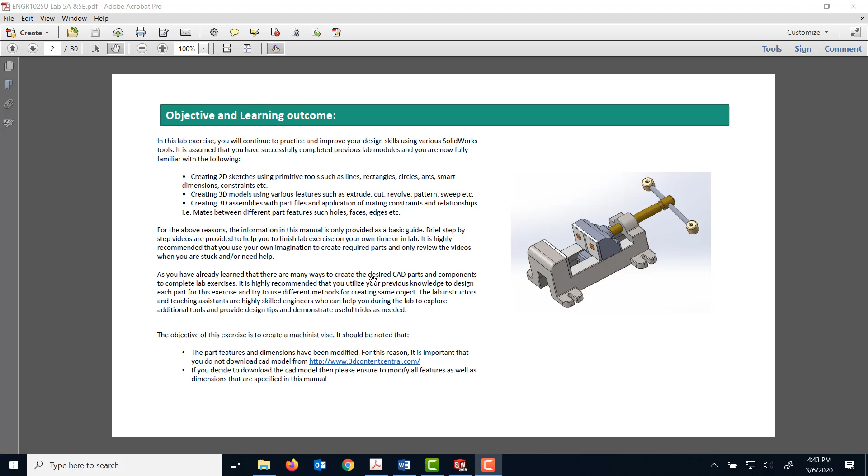The first component that I'm going to design as part of this exercise is called the vise lead screw. This object, when I look at it, could be created two different ways. I could just think of it off the top of my head. One way is you could create a 2D circle sketch.

You could extrude it, and then draw another sketch and extrude it. And then on this surface, you could draw another circle and extrude it. And so you could continue on to create the shape.

Or you could simply draw a 2D sketch. You could draw a center line right in the middle, and scale these dimensions, the diameter dimensions, specifying the radius dimensions along there. Then if you draw the half sketch of it, you could use the revolve base feature to do the revolution and create this 3D object.

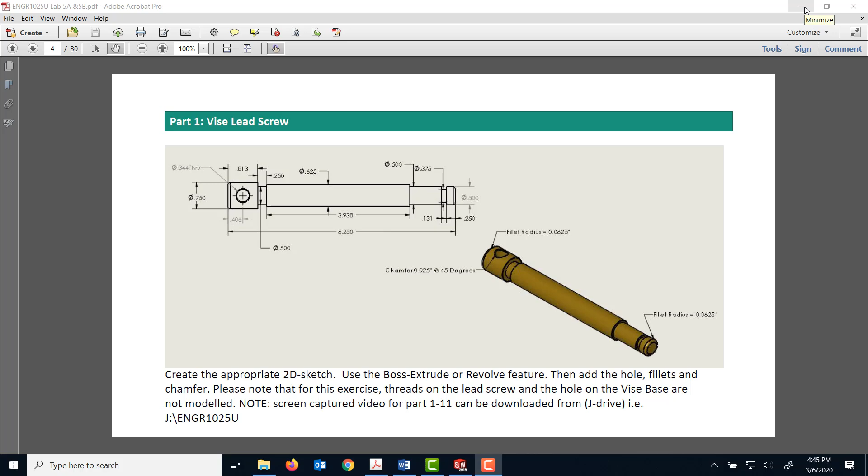So in my case, I'm going to do the revolution method to create this vise lead screw. To start, for this lab exercise, you will be working with the IPS unit. The reason for that is because in North America, the IPS units are still used quite often. So in this lab exercise, you will use that for all the components.

So to start the process, I have already created a folder with our naming convention. I have called it ENGR1025U underscore lab 5, but in your case, you will put your student ID in there. So I'm going to name the first part as...

Vise lead screw, and I'm going to save.

To draw the sketch, I'm going to select the top plane, right click on it and look normal to it, and go to the 2D sketch tool and click on the sketch icon. The first thing I'm going to do is create a center line, drawing a horizontal center line like that, and add the dimension for this center line as...

6.25. Now I will create the 2D sketch profile that I will use to create the vise lead screw. I will be using the revolve boss base feature, revolving around this axis.

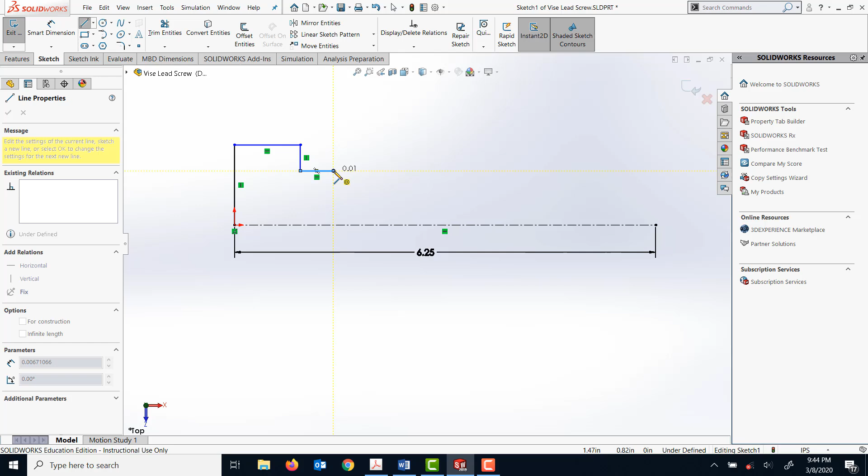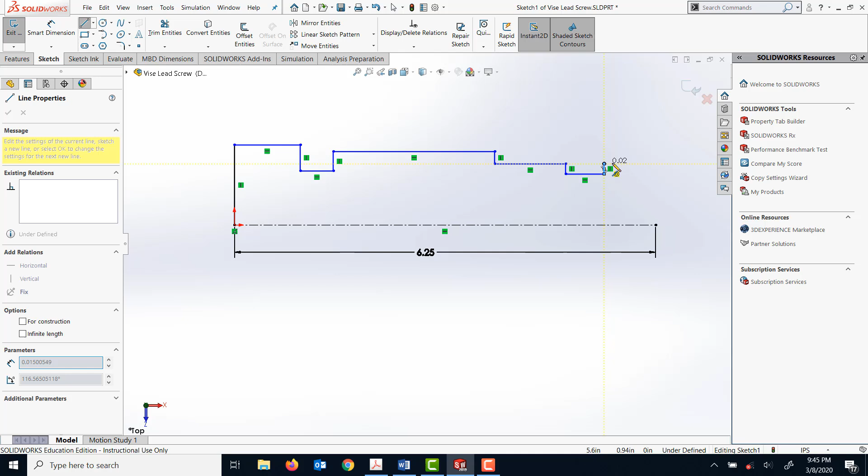So I'm going to start on this end. I'm going to make more or less a sketch profile that kind of looks like what I need, going a little bit lower there. I'm going to draw this line, and stop there, go across there, then come down a little bit and come around. Then I'm going to go like that, line up with this, and stop right there.

Now I will add the dimensions that I need to create this profile, starting with this side. I will be entering half of the dimensions that I need, because all I'm doing is drawing the half sketch. So this diameter is supposed to be 0.5 inches, so I'm going to enter the dimension here as 0.25, because I'm entering the radius.

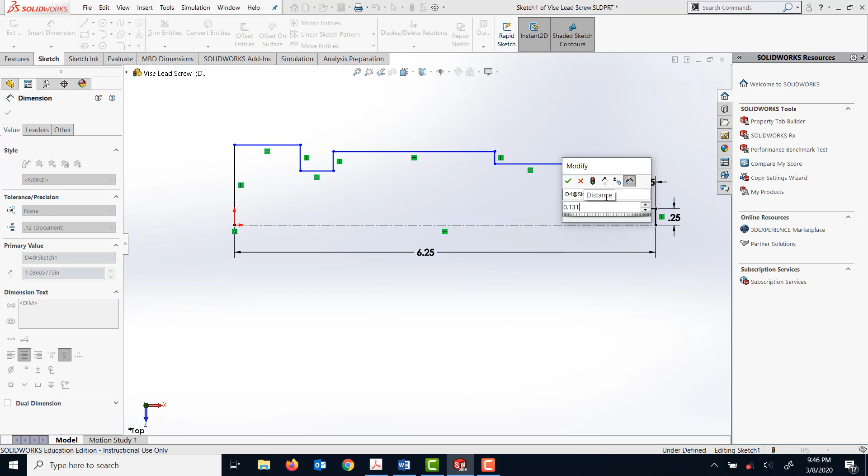This dimension is supposed to be 0.25 inch, and this dimension is supposed to be 0.131.

And the dimension from here to here, the diameter, is 0.375, so I'm going to enter 0.375 divided by 2. For the exact dimensions, please refer to the lab manual.

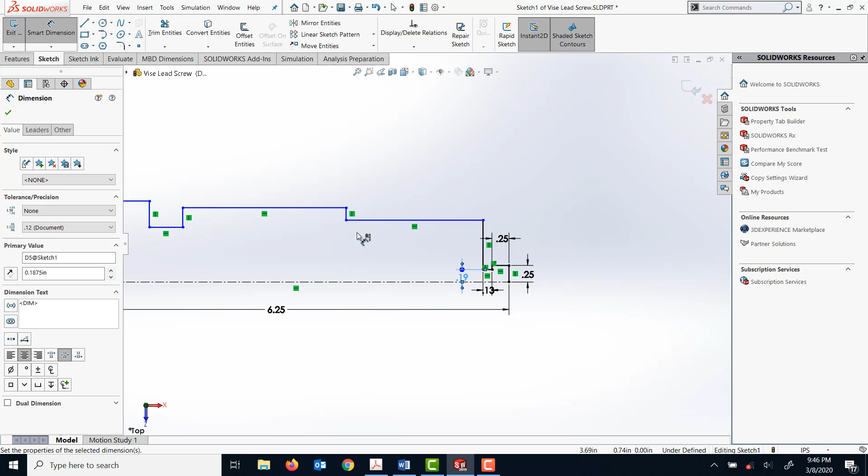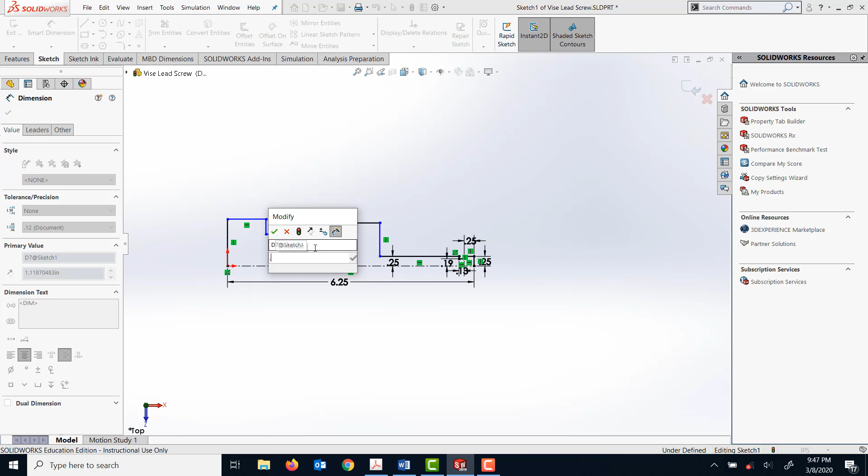Okay, from here to here, the dimension is 0.5 divided by 2, and this dimension is 0.625 divided by 2, and this dimension is 3.938.

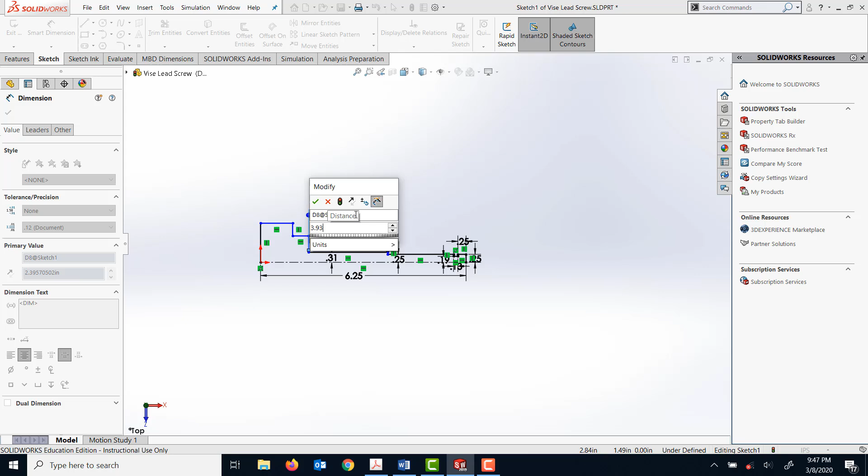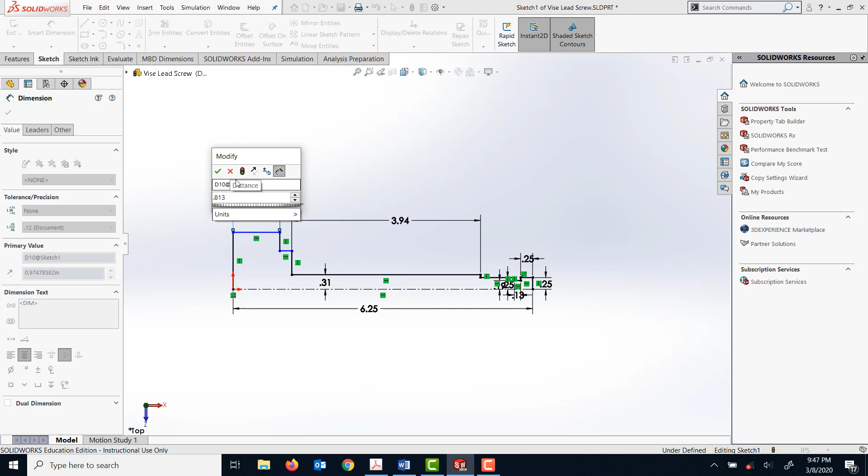This dimension is 0.25, this dimension is 0.813. And this diameter is specified at 0.75, so I'm going to enter this dimension, which is radius, 0.75 divided by 2.

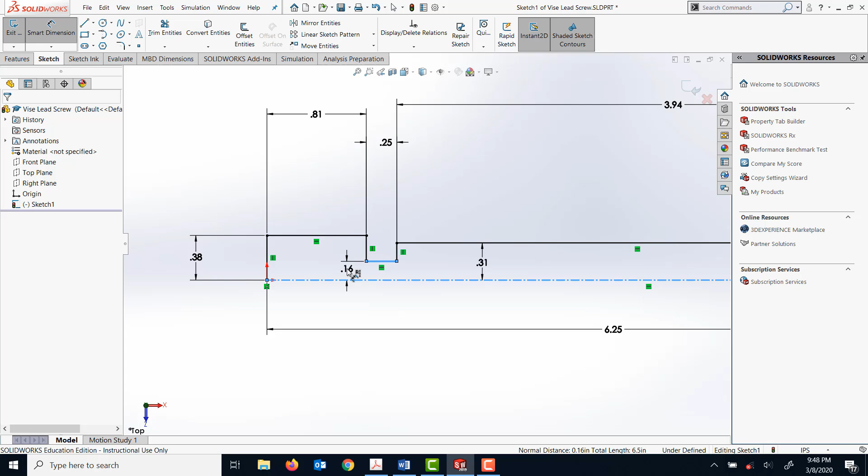I'm going to get out of this, just move this up so that I can enter the dimensions properly. And this one is supposed to be 0.25, basically 0.5 divided by 2. So now my sketch is fully defined.

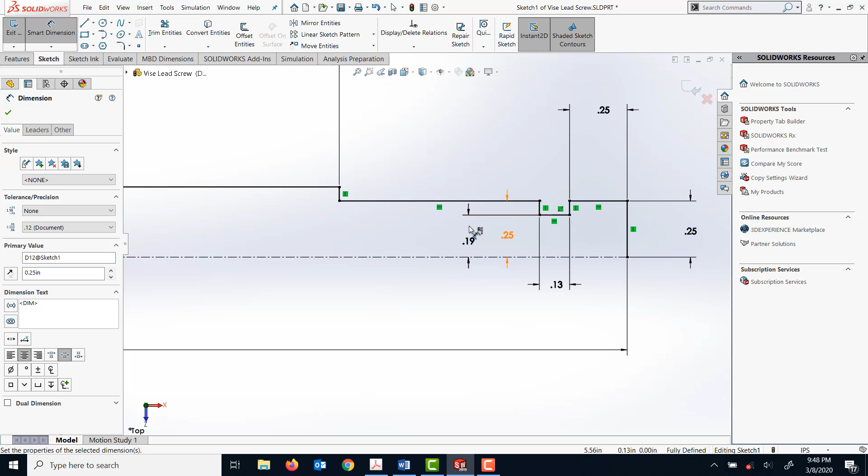My sketch profile looks so good, everything seems to be falling into place. So what I'm going to do is go to feature. After clicking on the revolve feature, I selected the center line for axis of revolution, and I'm going to select and click OK. So basically this is started looking like the vise lead screw shown in your lab manual.

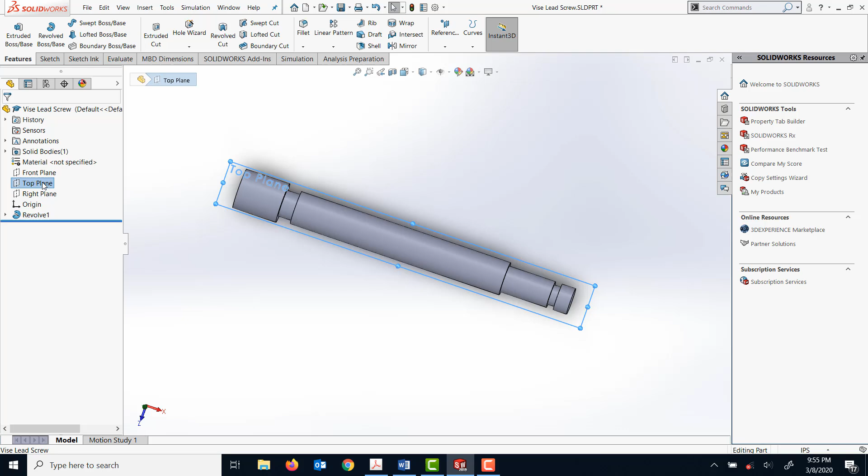The next feature I'm going to add is a hole. To do that, I'm going to select this top plane, click look normal to, and add a sketch there. The dimensions are shown in the lab manual. I'm going to line up a 2D circle there and create this circle.

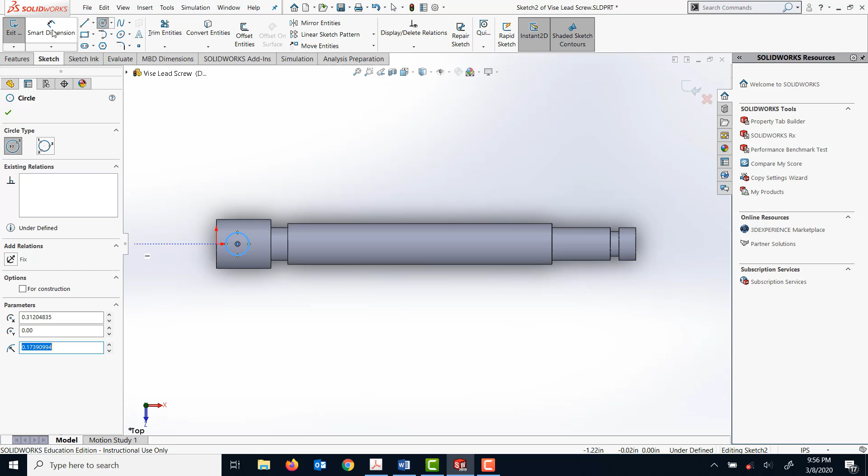The diameter for the circle is 0.344, and I'm going to click OK. The dimension from this point to this point is shown as 0.406. I'm going to click OK.

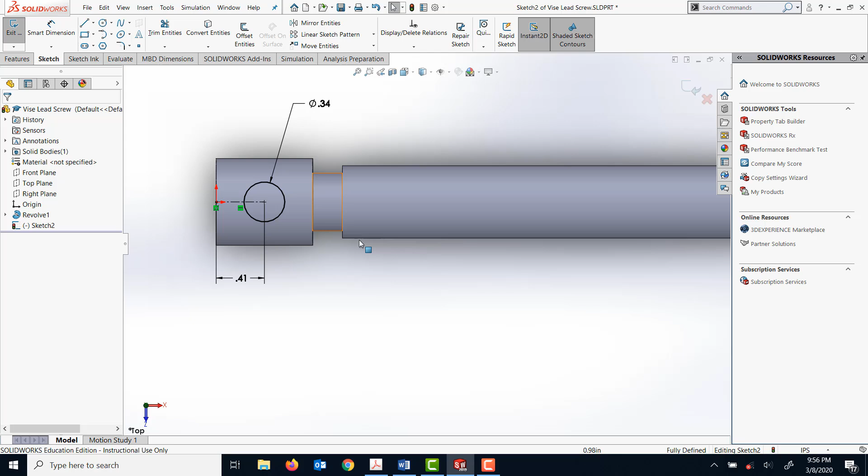My sketch is still underdefined, so I'm going to fully define it. I'm dropping a line there, a center line, so that it's coincident with the center point of that 2D sketch, basically the 2D circle. Now I'm going to go to feature, do cut extrude, and cut through both sides, and click OK.

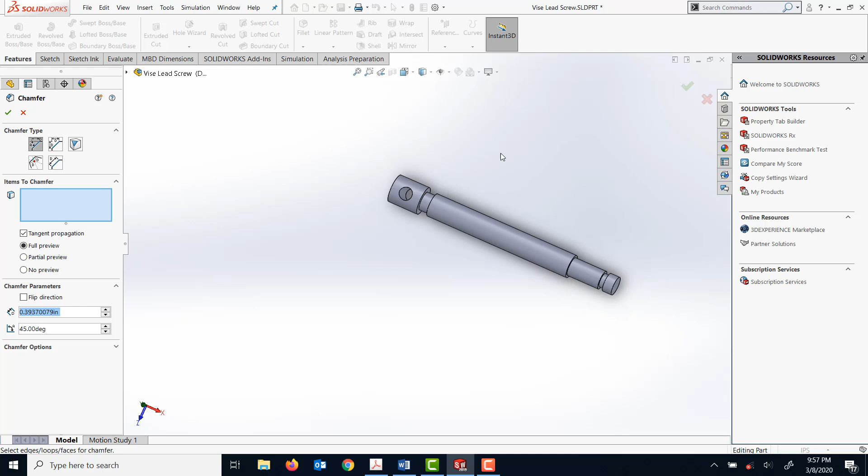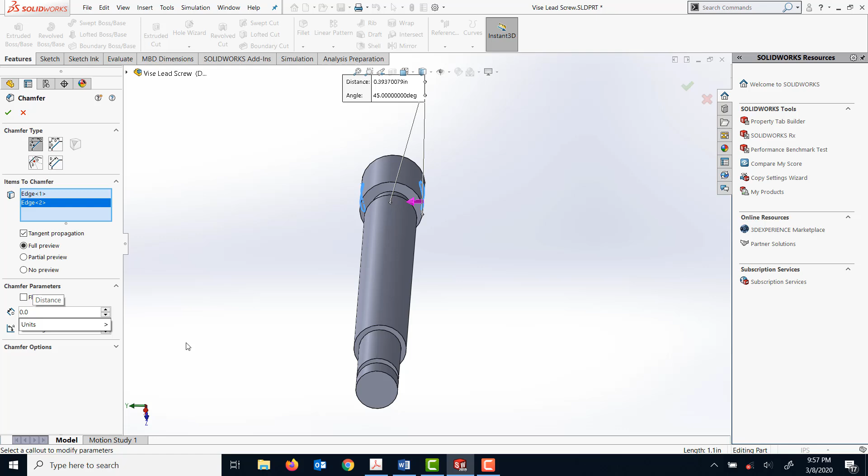So this is done. The last features I need to add are the fillets and chamfer. To do the chamfer, I'm going to click on this fillet, and under there is this triangle. I'm going to click on chamfer, select this one, select this side after rotating it, and enter the dimensions, which is 0.025 at 45 degrees, 0.25, and click OK.

Now I'm going to add the fillet, on this edge and this edge, and it's supposed to be 0.0625. I'm going to click OK, and that's it.

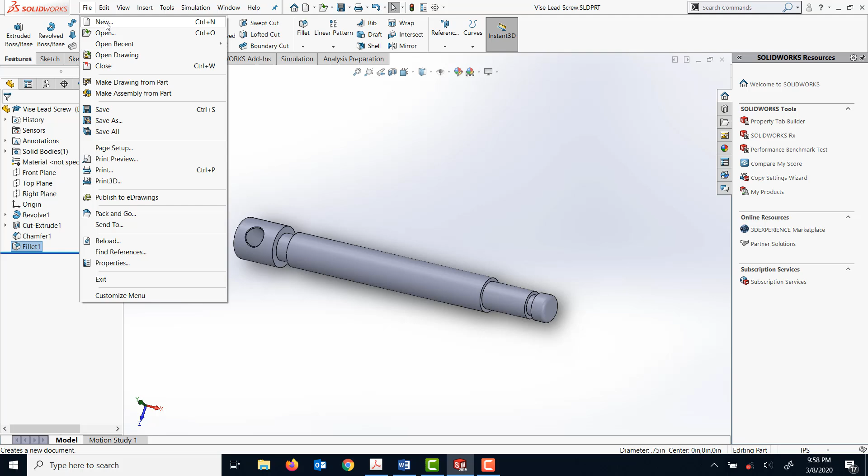So this basically completes the vise lead screw. I'm going to save this file and move on to the next part. I'm going to open a new document, open a part, and save this part as vice screw retainer key. In your case, you will add your student ID there as well, so that it's identified as your work.

So here, what I'm going to do is select this top plane, look normal to, which is what I normally do. The units are set as IPS by default, that's what I need. I'm going to click on sketch, and simply draw a 2D circle.

The dimension I'm going to enter for the circle diameter is basically twice the radius that I have, which is the internal inner circle, specified as 0.195 radius. So I'm going to take 0.195 times 2, because I'm entering the diameter. So that's what I have done.

Now I'm going to draw a center line from here to here, and now a horizontal line from this point somewhere there, escape. I'm going to do the same thing on the other side as well, lined up there, escape. Now I'm going to draw another circle.

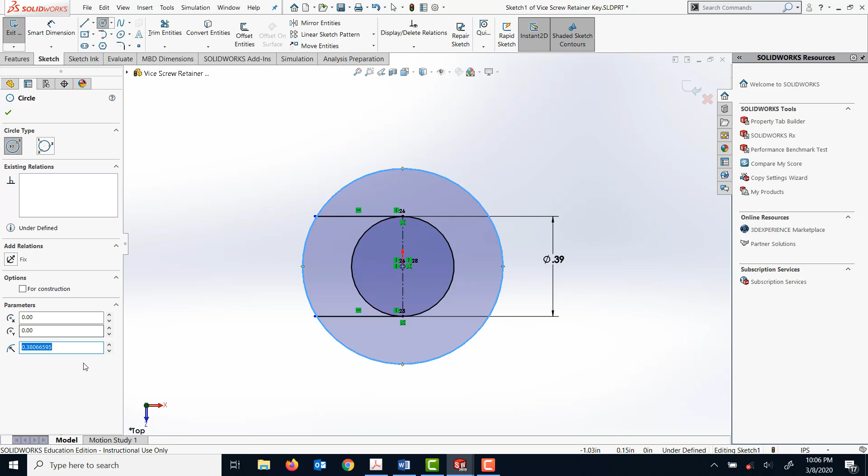I'm going to go to the center point, and for this circle, the radius I'm going to enter is 0.395. I'm just going to enter it right here. So this is okay. What I'm going to do is extend this one a bit this way, and extend this one a bit this way.

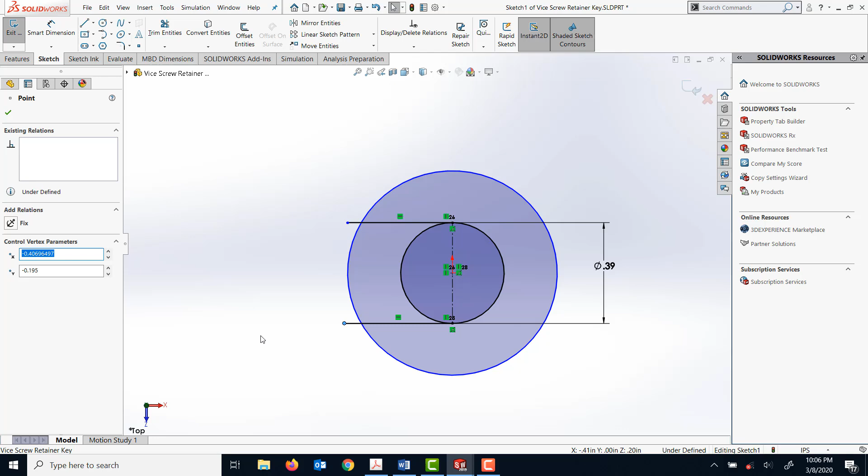Now I'm going to start trimming the sketch profile that I don't need. I'm going to click on trim entities. I'm going to delete this one, trim this one, and trim this. I'm going to trim this, and the sketch looks like what I need.

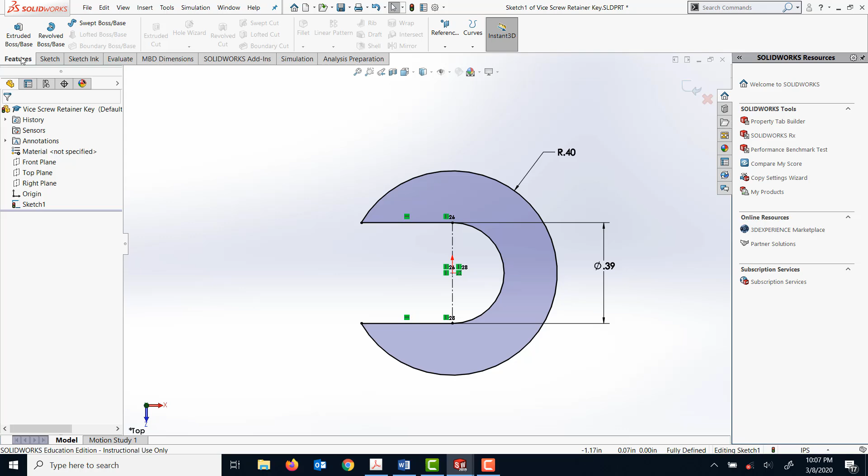Now I'm going to add the dimensions. The dimension for this one is going to be 0.395 inch. So that's okay, the sketch is fully defined. Now I'm going to click on features, select extruded boss base, and extrude it by 0.124 inches.

0.124 inches. Save. So basically this is the part that I need. I'm going to save my file, and this completes part 2, which is the vice screw retainer key.

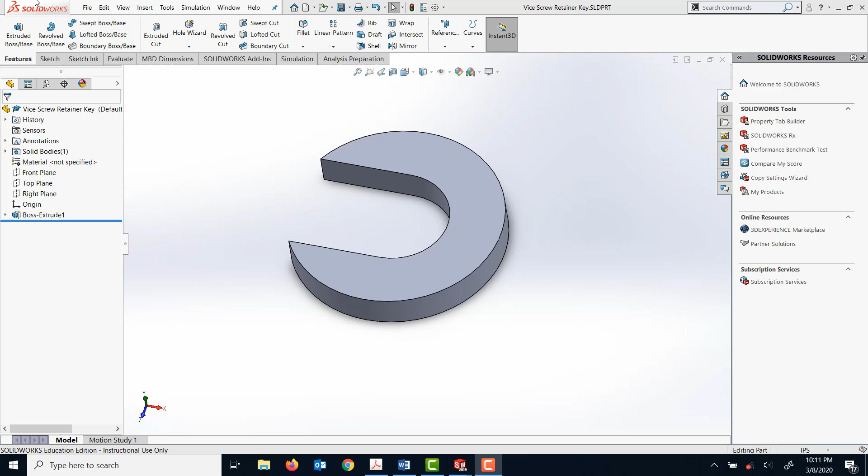Now I will create part 3, which is the vice collar. To do that, I'm going to open a new part file, and I'm going to save this file.

I'm going to save it in the same working folder. I'm going to call it vice collar.

And the units are IPS for this part as well. All the parts are in IPS.

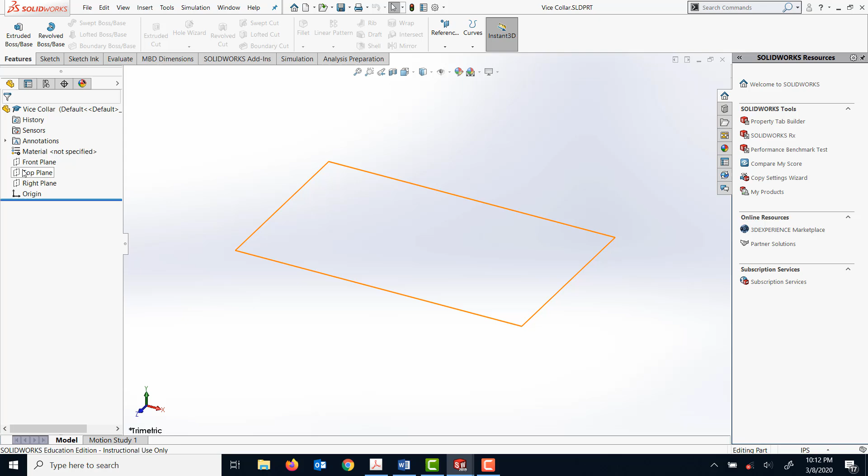To start the part, I'm going to click on the top plane, look normal to it, and add a 2D sketch. I'm going to start with a circle, entering the radius as 0.256.

0.256, and I'm going to add another circle there. The radius for that one is 0.359.

0.359. Click OK. To fully define the sketch, I'm going to just add the dimensions as in the manual.

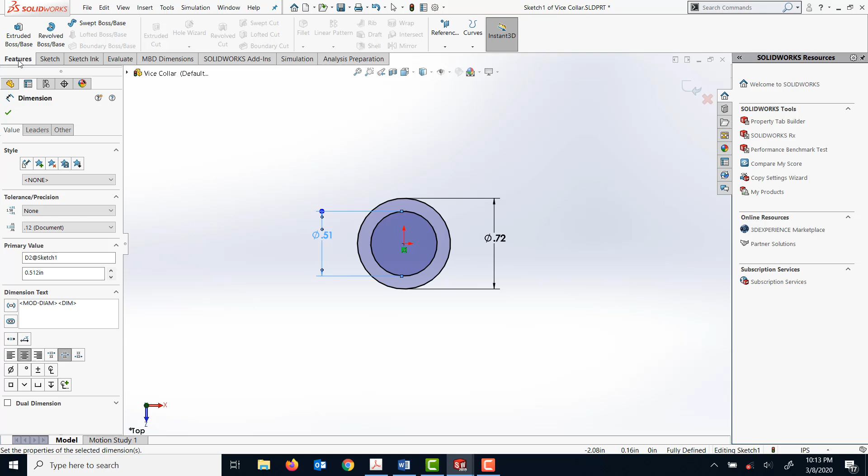Okay, so the sketch is fully defined, and now I'm going to click on features, and I'm going to extrude it by 0.813.

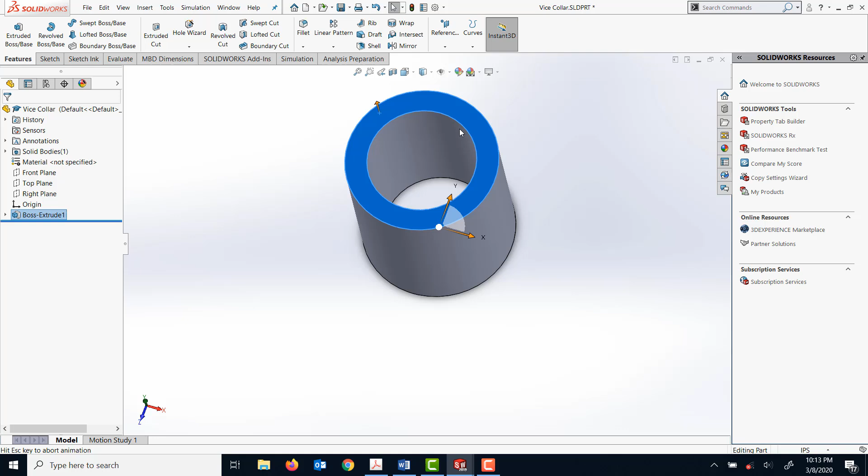So this is okay, and now I'm going to select this top face, look normal to it, and cut the slot in it.

To do that, what I need is to draw a rectangle. I'm going to click on sketch, and basically draw a center line.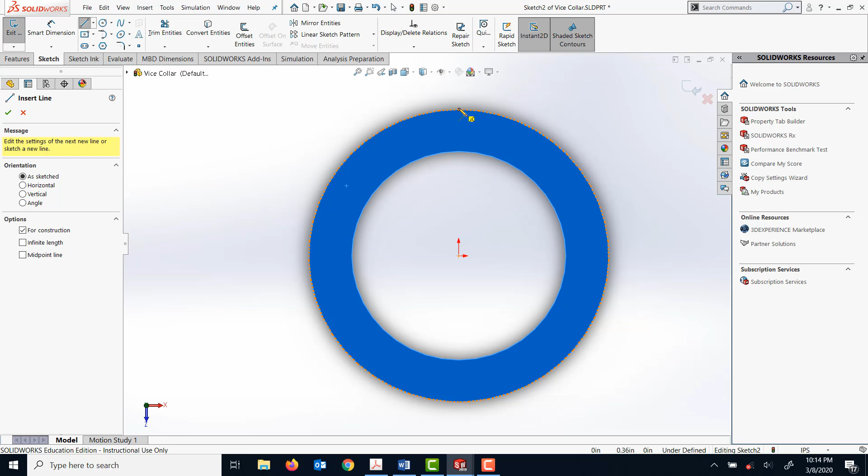I'm going to start somewhere there, and end it there.

Escape, and now what I'm going to do is draw a sketch coming down somewhere here.

I can overshoot because I can make a cut anyway.

Now I'm going to basically move this one up a bit so it coincides with the center line. And now I'm going to use the mirror feature.

Before doing that, I'm going to add the dimension. The dimension here is half of what I need. It's going to be 0.094 divided by 2.

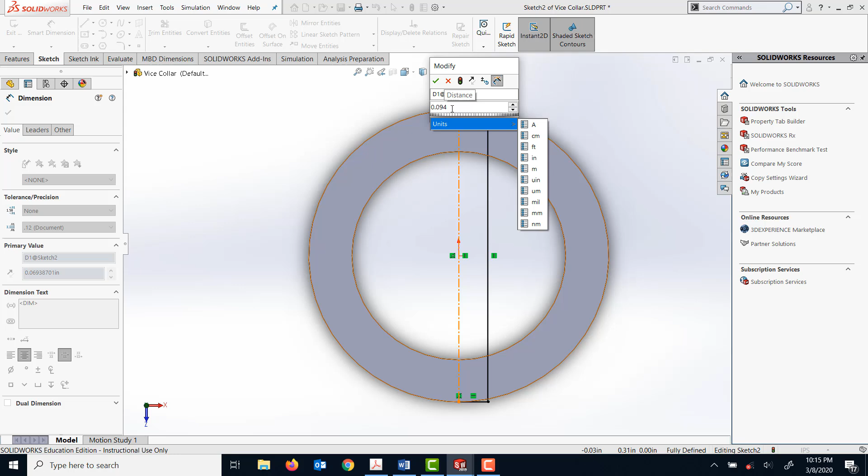And that's it, the sketch is fully defined. So I'm going to mirror the sketch on the other side around this center line.

To do that, I'm going to select mirror entities. I'm going to select this line, this line, this line, mirror about, enter this, and click OK. And this is basically the sketch I need.

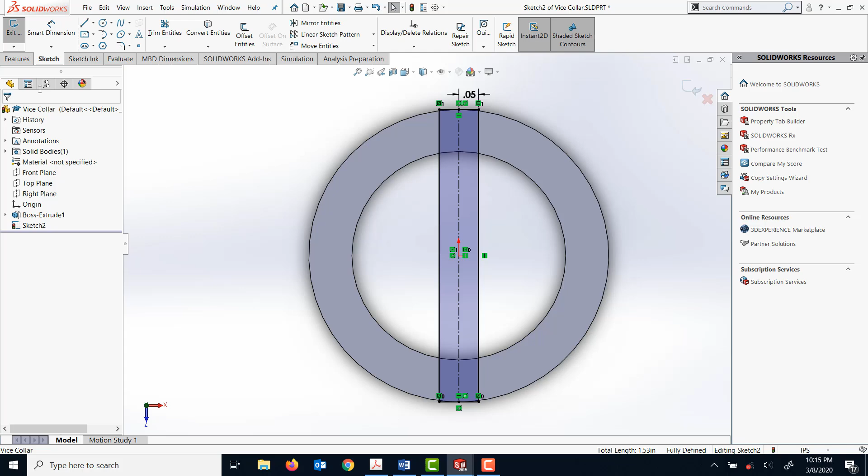I'm going to click on feature, click on extruded cut, and the depth of the cut that I need is 0.125.

Click OK. So basically this completes my vice collar.

So I'm going to save this part and open a new part file for part 4.

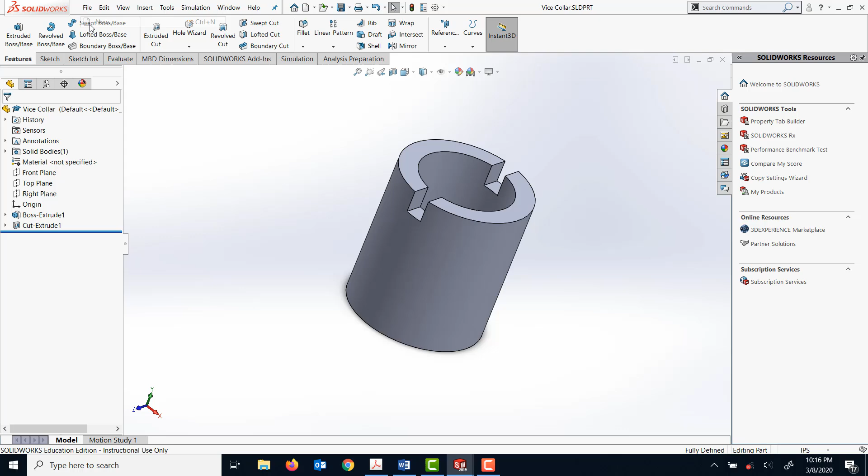This part 4 I'm going to save as vise screw handle rod.

This is a simple part. All I'm going to do is create half of the section with one hole on one side, and then just use the mirror feature.

To create this part, I'm going to draw a sketch on the top plane, look normal to it, click on sketch, and draw a circle.

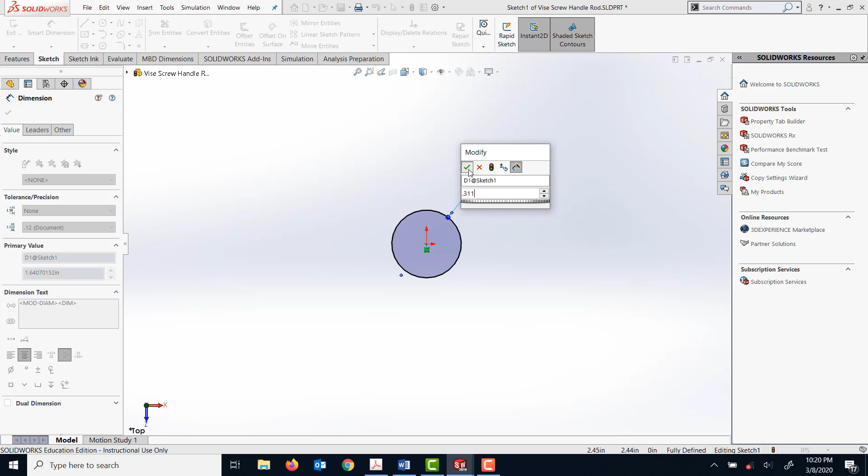Now I'm going to extrude it, and the extrusion I'm only going to extrude by half of the length that I need, which is going to be.

5.125 divided by 2. I'm entering half of the length because I'm going to mirror it.

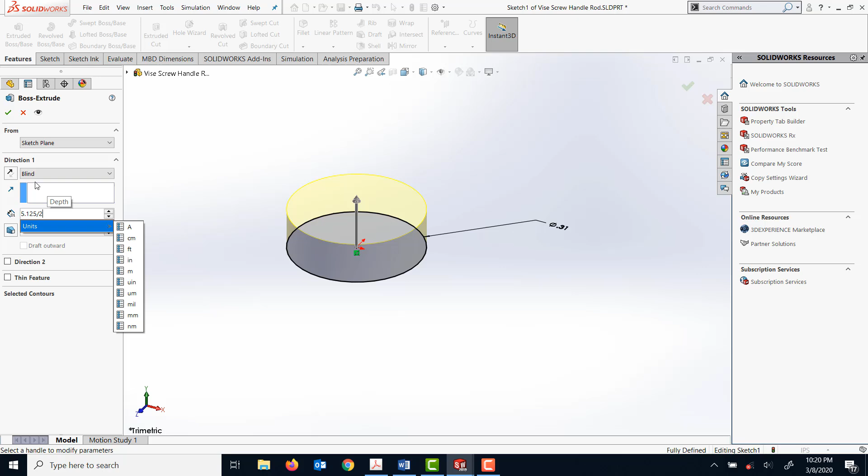Okay, and now I'm going to select the right plane, look normal to it, and add the hole by simply drawing another circle on this right plane.

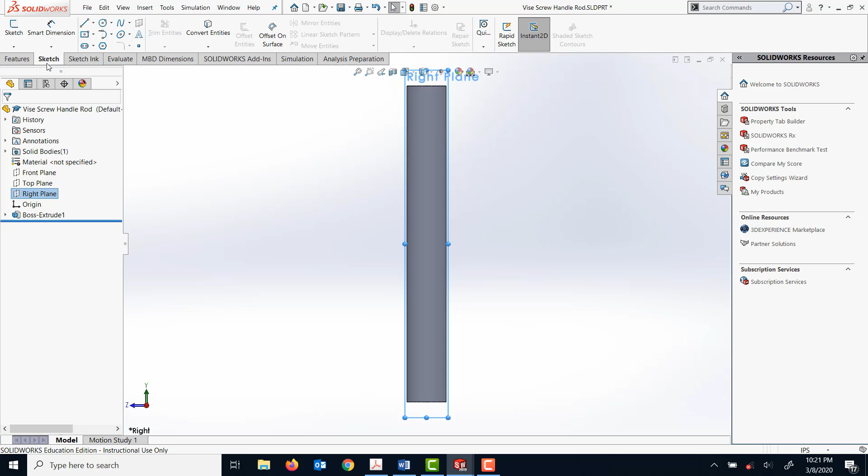I'm going to click on sketch and draw a circle. To draw it, I'm going to line up this one somewhere here, and drop it there.

And the dimension that I am going to specify is the center line to this edge.

The distance is 0.125 inches, and the diameter for this one is supposed to be 0.125.

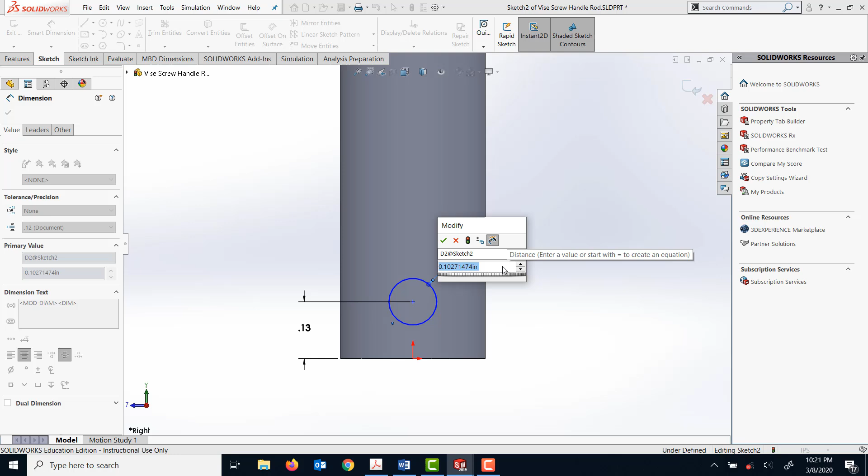And I just want to make sure my sketch is fully defined. To do that, I'm simply going to draw a center line, which fully defines the sketch.

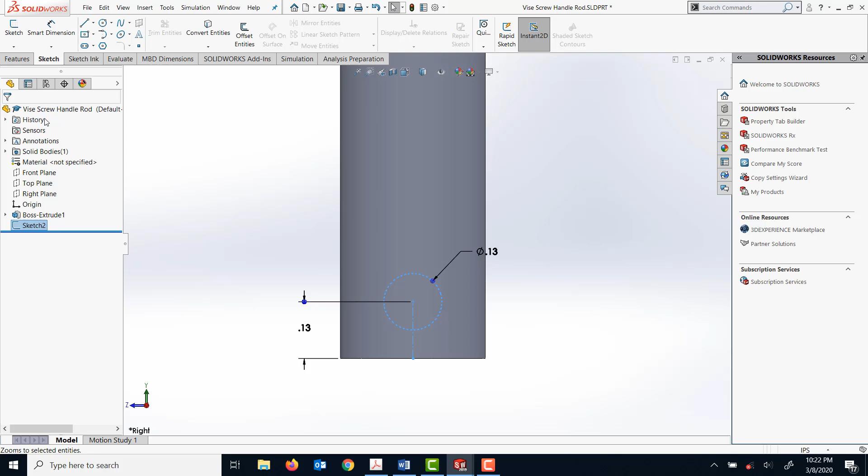I'm going to exit that, and now select the sketch I've added, click on features, and under there select extruded cut, and select through all both sides.

And I'm going to click OK.

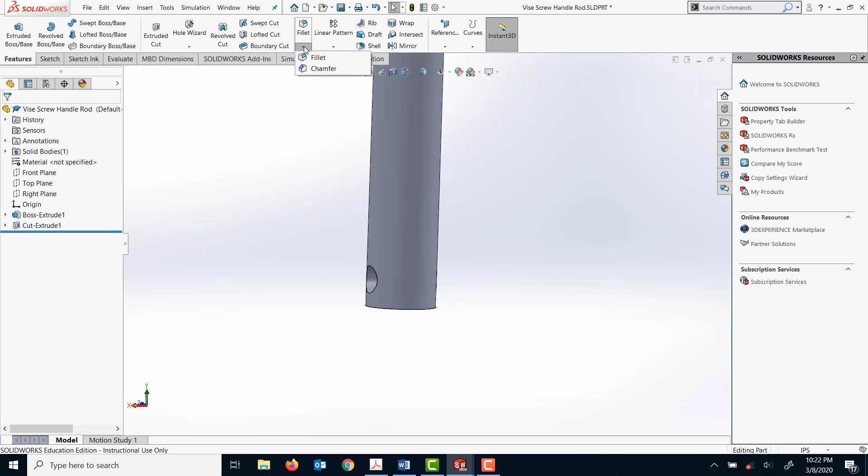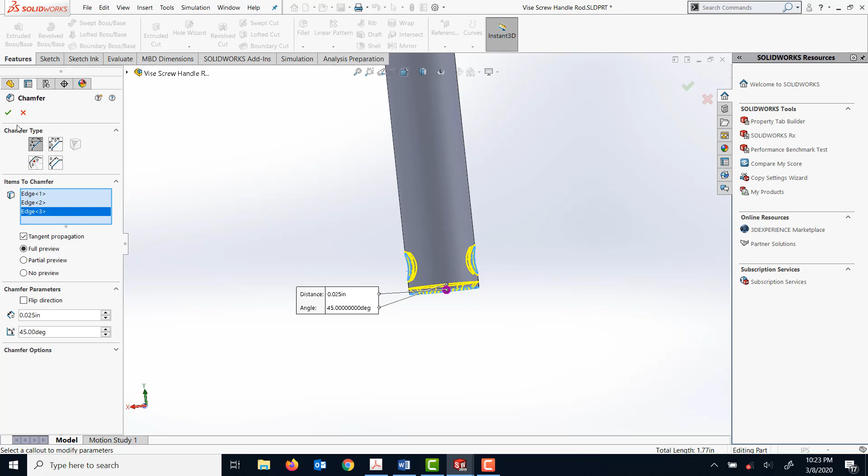So to do that, I'm going to click on the chamfer feature. I'm going to select this edge, select this edge, select this edge, and basically the dimension for the chamfer is 0.025 inches at 45 degrees. I'm going to click OK, and that's created, but it's only half of the section.

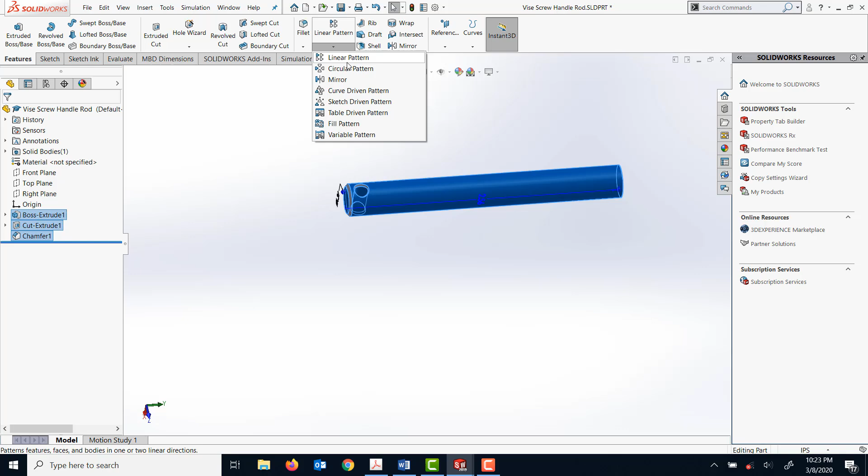So now what I'm going to do is select all these features that I have, and go to the feature tab, and select the mirror feature under this linear pattern drop down menu. In here I'm going to select mirror, and the face I'm going to mirror about is this face, and I'm going to click OK, and there you go. This is what you need, and I'm going to save this file.

And now I will move to the next component. There are two components: part 5 and 6, whichever way you want to number them. The first one, shown in the lab manual, is the pin. The second one shown is the handle cylinder. So I'm going to start with the pin, and I'm going to open a new part.

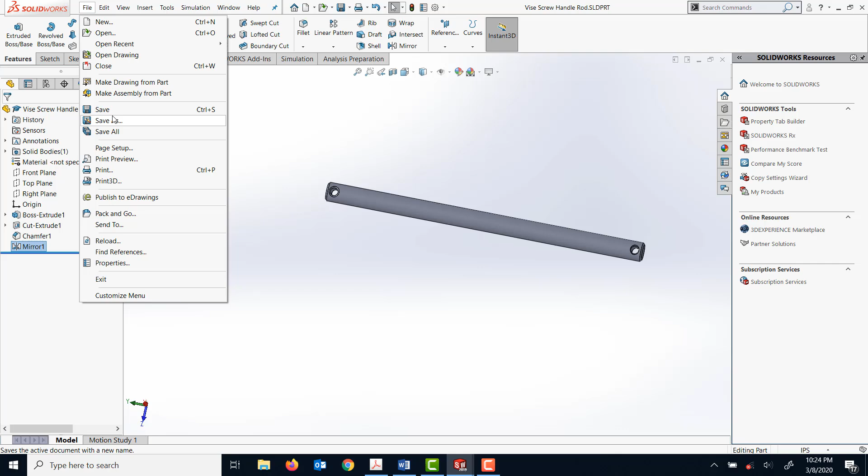Oops, I'm going to click on open a new part, and I'm going to save this file as pin, handle pin. It's a very simple part.

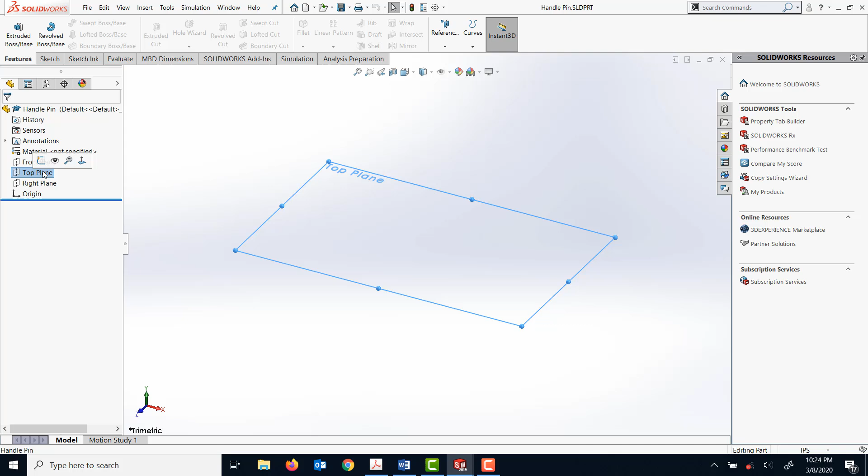I'm going to select and draw a circle on the top plane, and then extrude it. I'm going to click normal to, go to sketch tab, click on sketch, and select 2D circle and draw a circle there. The diameter for this pin is supposed to be 0.125. I'm going to go to feature tab, click on the extruded boss, and the depth or length is 0.531.

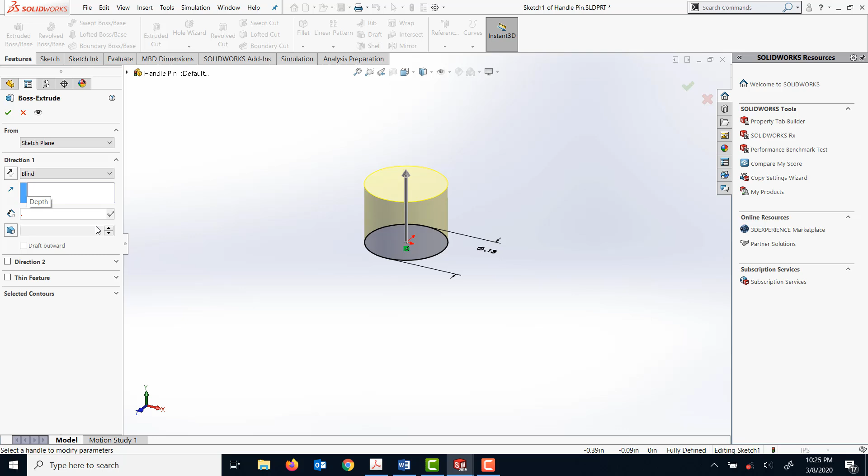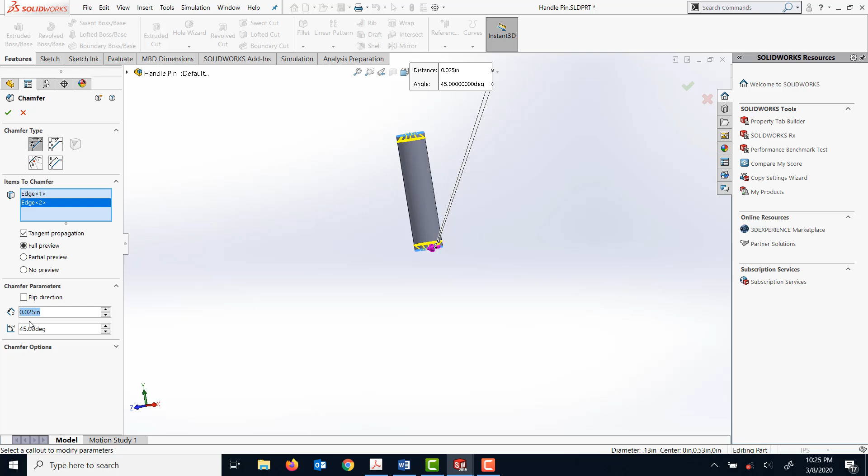And now I'm going to add the two chamfers which are specified. To do that, I'm going to click on the chamfer tool, and then select this edge, and select this edge, and the dimension for the chamfers is 0.025 inch. I'm going to click OK. So this basically completes the pin, and I'm going to save this file.

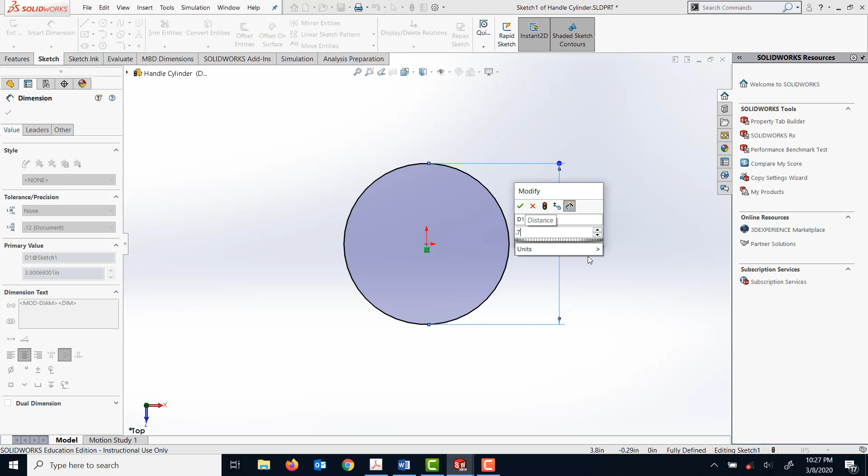And now I'm going to open a new part file, and save this file as handle cylinder. I'm going to select the top plane, look at normal to, go to the sketch tab, click on sketch, and draw a circle. The diameter for this circle I'm going to specify as 0.750 inches, and I'm going to extrude it.

I'm going to go to feature tabs and use the extruded boss feature. The length or depth for this one is 0.75.

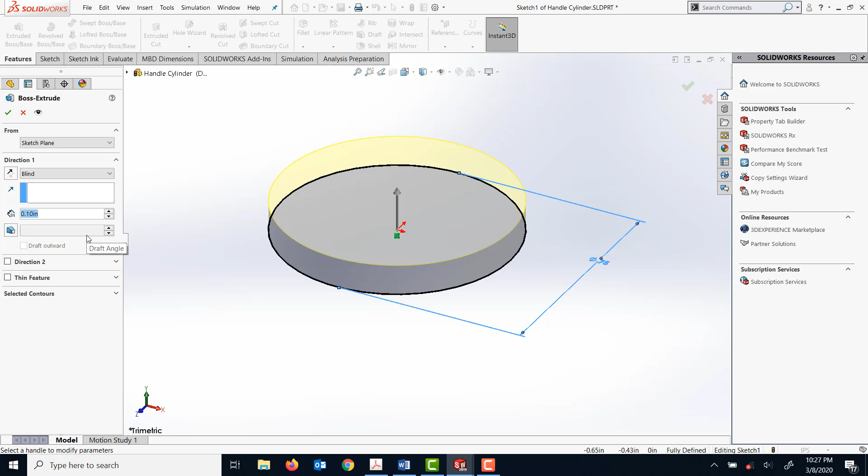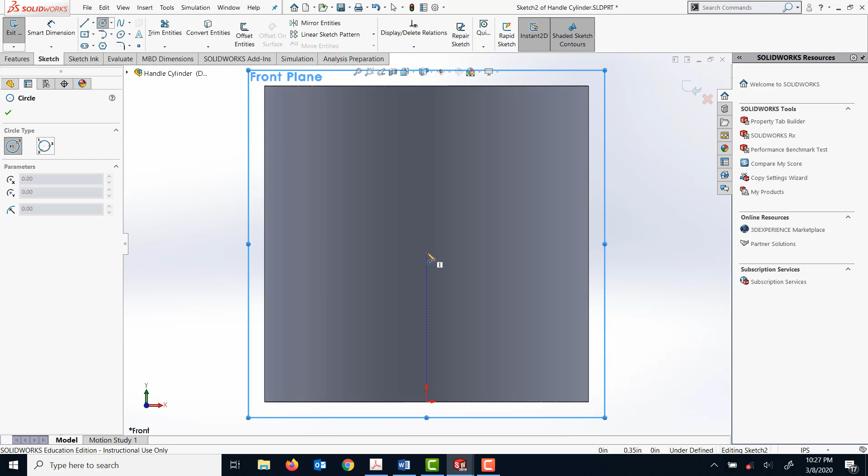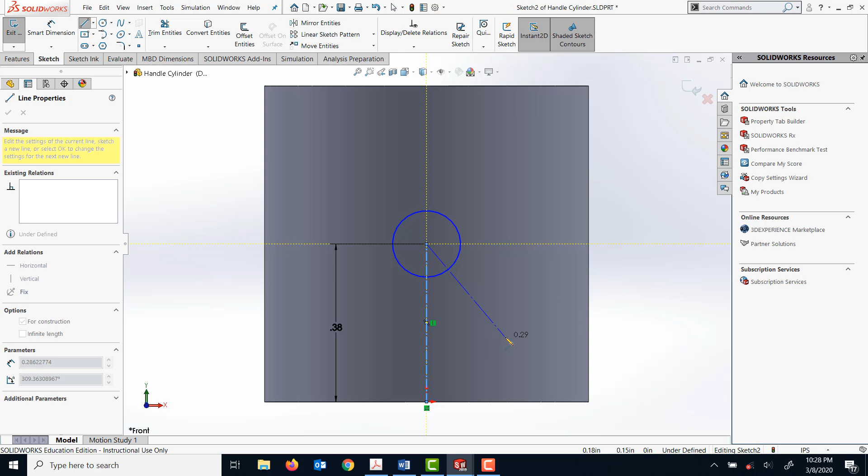So this is done, and now I'm going to add two holes. The first one, I'm going to select my front plane, look normal to, click on sketch, select a circle, and drop the circle somewhere there, and add some dimensions to fix it. This is supposed to be halfway in the middle, so I'm going to enter 0.75 divided by 2, and draw a center line so that my sketch is fully defined. The diameter for this one is supposed to be 0.31.

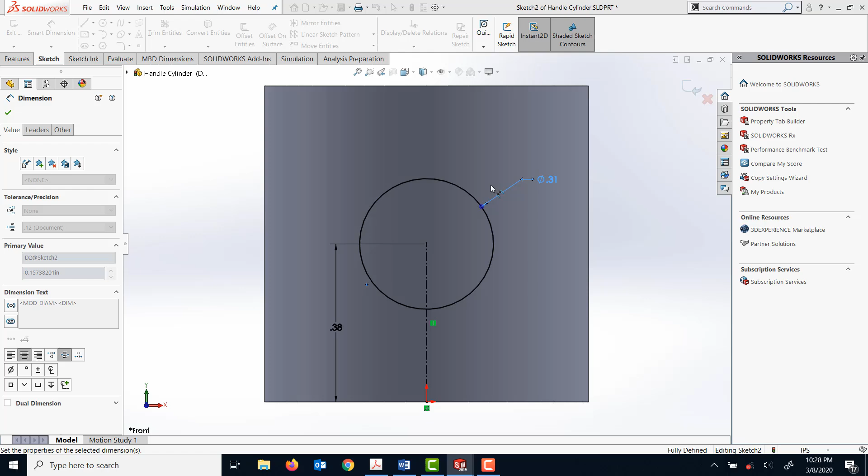And I click OK. So one thing you notice, my circle is right there in the middle. Now I'm going to adjust my depth in a way that it is what I need as per your lab manual. To do that, I'm going to click on the feature tab. I will need to make an extruded cut.

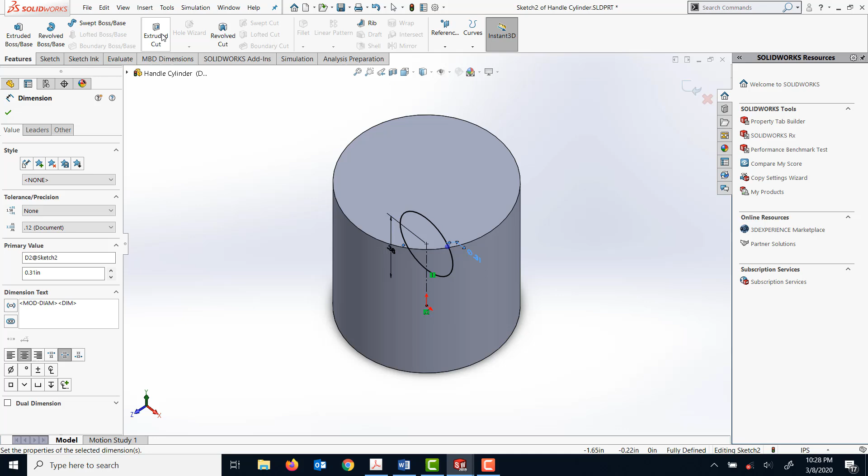I'm going to make the extruded cut in two directions. In this direction, I'm simply going to go through all, so it basically cuts it all the way. The second direction I'm going to specify as not through all, it's going to be blind. All I need is the depth starting from this edge to the total depth of 0.575.

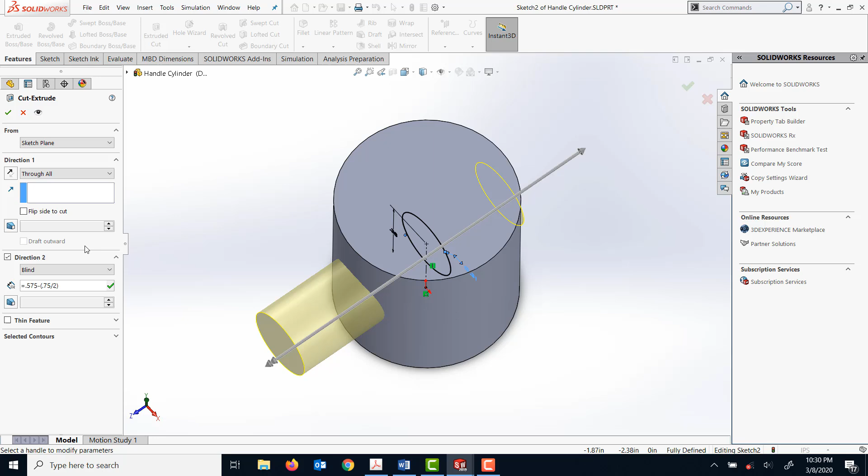So this is basically going to require a formula here, and that's going to be 0.575 minus 0.75 divided by 2. All I'm doing is calculating the depth starting from the sketch, how much deep I need to go in this direction. I'm going to click OK. So this one looks okay. Yep, that's all I need.

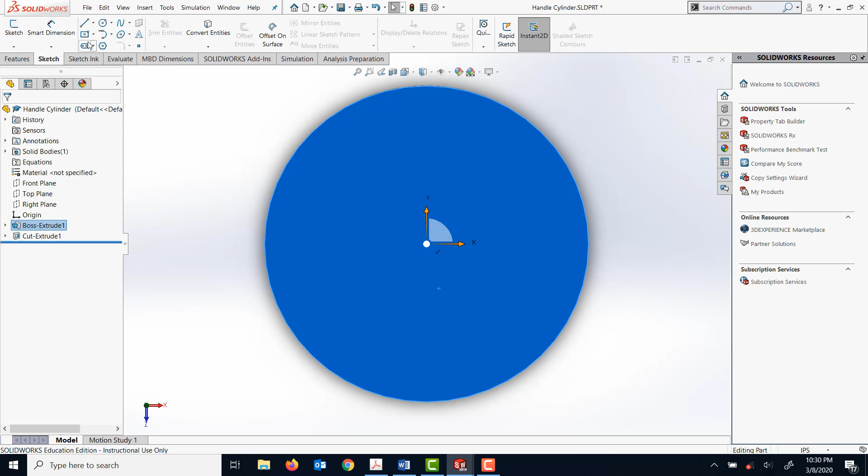And now I'm going to add a hole on the top. I'm going to select this face, look normal to, and go to sketch and draw a circle right in the center. The diameter for this circle is supposed to be 0.125.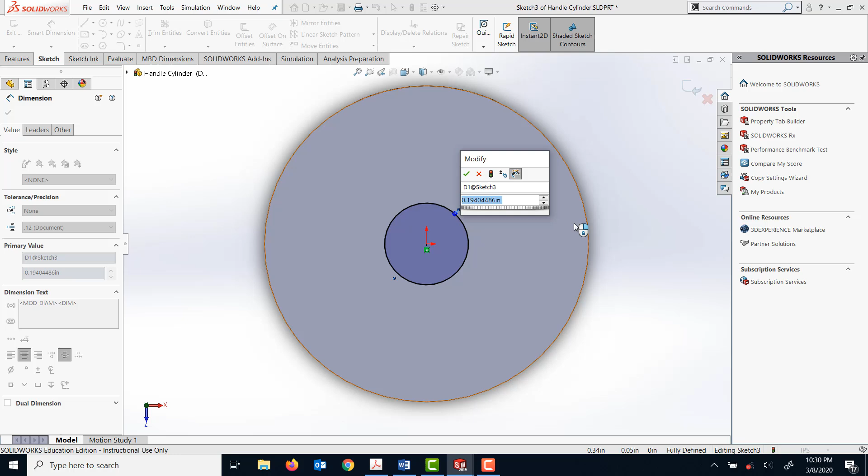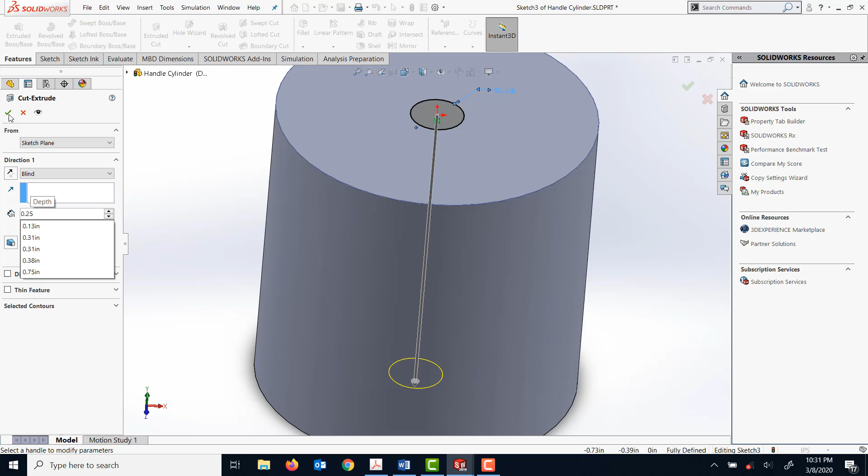I'm going to click on Smart Dimensions and specify the diameter as 0.125 inches. Once I've done that, I'm going to go to features and use the extruded cut tool, and the depth of that cut is 0.25. Oops, I have another decimal there. So now if I look from this side, it cuts through, so it goes through. That's what I need.

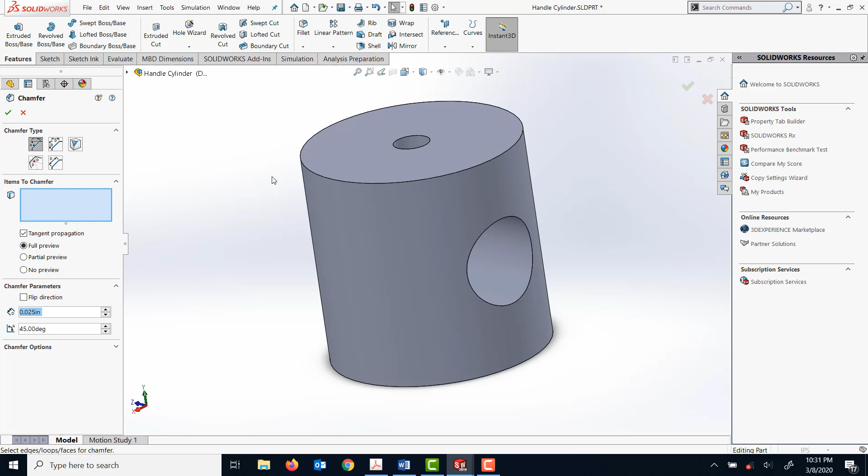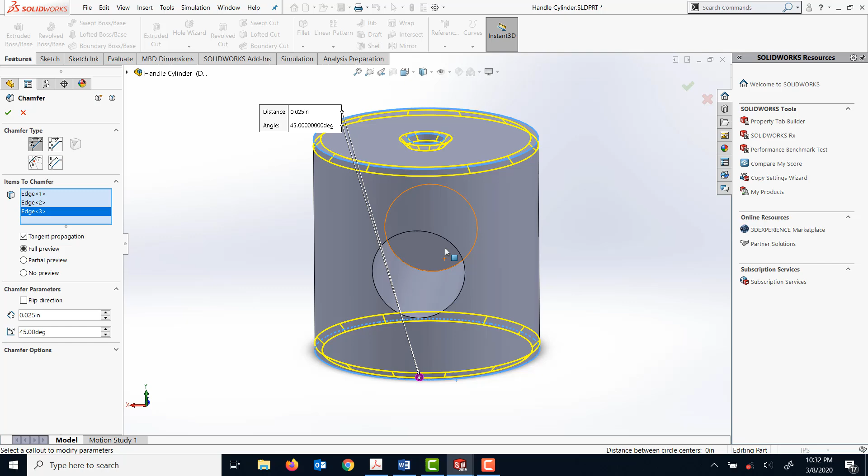And now I'm going to add the chamfers, and there are 4 chamfers. First I'm going to select the chamfer tool, and select this edge, select this edge, and select this edge, and select this edge. These are the 4 chamfers I need, but the dimension for the chamfer is 0.065. So I'm going to change that to 0.065, and click OK.

So the handle cylinder is complete. I'm going to save this file.